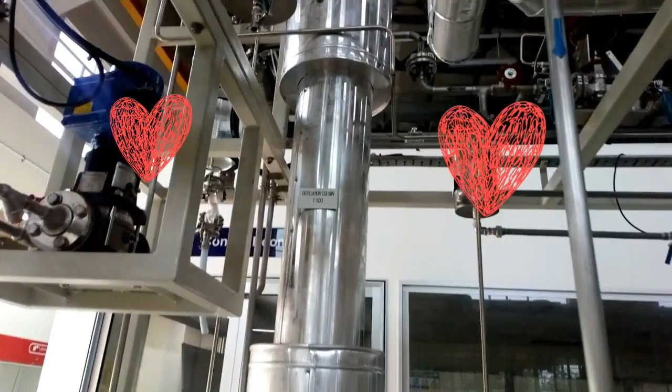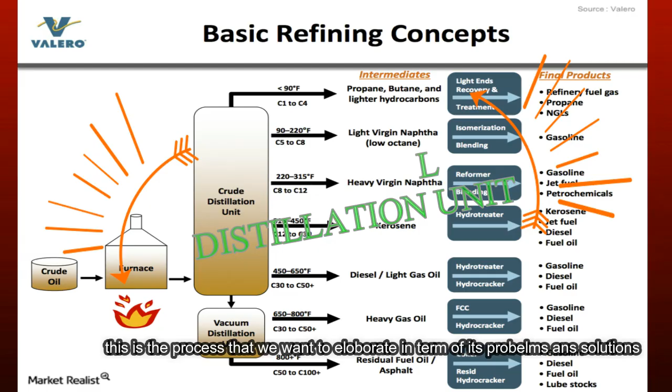The first process for all petroleum refineries is known as the distillation process in a crude oil distillation unit, or CDU. This is the process that we want to elaborate on in terms of its problems and solutions.

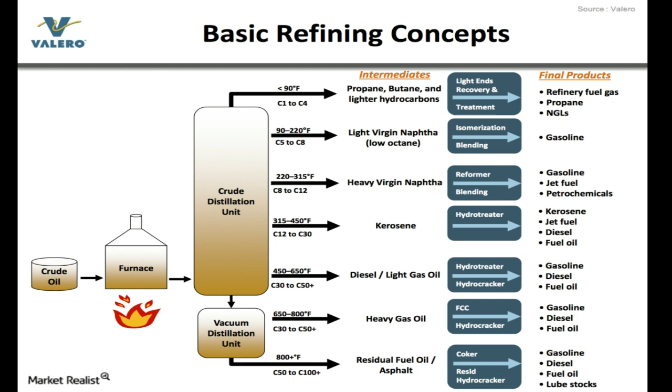In this process, crude oil is heated and fed into a distillation column. As the temperature of the crude oil in the distillation column rises, the crude oil separates itself into different components called fractions. The fractions are then captured separately into various fractions of different boiling ranges. Each fraction corresponds to a different type of petroleum product, depending on the temperature at which that fraction boils off the crude oil mixture.

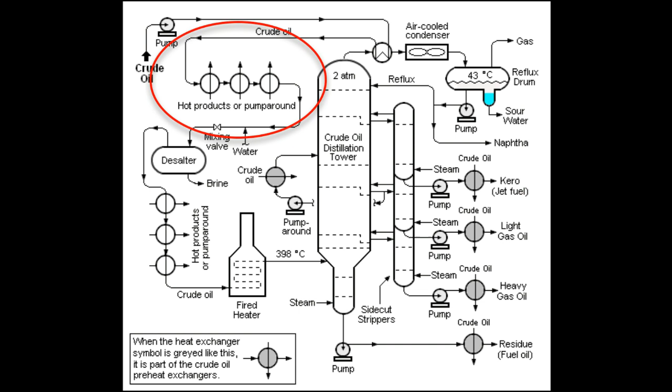Based on the figure, it shows the process in the crude oil distillation unit. After the incoming oil is preheated by a heat exchanger, it is then desalted to remove inorganic salts such as sodium chloride. After that, the crude oil is further heated in a fired heater at a temperature around 398 Celsius and routed into the bottom of the distillation unit.

Cooling and condensing of the distillation tower overhead is provided partially by a heat exchanger with the incoming crude oil, and partially by an air-cooled or water-cooled condenser. Additional heat is removed from the distillation column by a pump-around system, as shown in the figure. The overhead distillate fraction from the distillation column is naphtha.

The fraction removed from the side of the distillation column at various points between the column top and bottom is called a side cut. Each of the side cuts, such as kerosene, light gas oil, and heavy gas oil, is cooled by exchanging heat with the incoming crude oil.

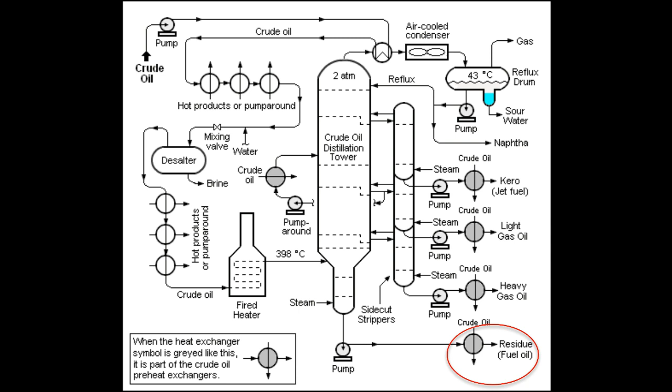All of the fractions, such as the overhead naphtha, the side cuts, and the bottom residue, are sent to intermediate storage tanks before being processed further to get the heavy residual oils into end products like petroleum coke, as well as naphtha and diesel oil byproducts.

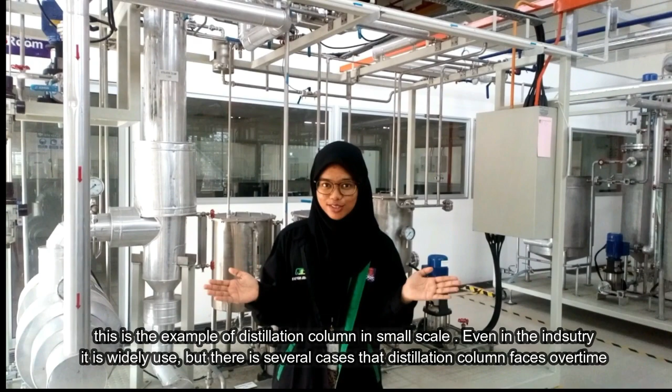Okay, so this is an example of a distillation column on a small scale. Even in industry, it is widely used. But there are several cases that a distillation column faces over time. So let's see the problems that a distillation column undergoes.

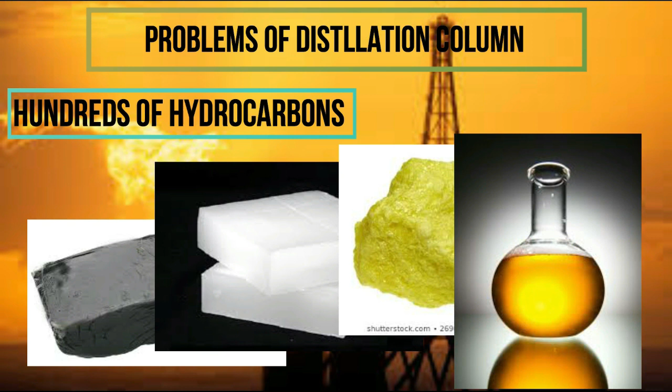The first problem a distillation column faces is that hundreds of hydrocarbons enter the vessel at one time - for example, naphtha, paraffin, sulfur, octane, and many more. How does the vessel handle all of these substances at one time? Does the distillation stand up to all of these substances? Let's move to the second one.

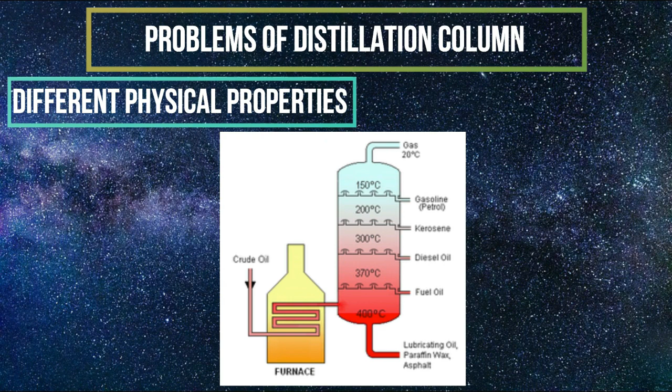Because there are so many mineral and chemical substances, they tend to have different physical and chemical properties. As we all know, distillation separates components according to their boiling point. But how does it make sure all the components are separated according to their group? This is because the boiling points of diesel, fuel oil, and lubricating oil are 300, 370 and 400 degrees Celsius respectively. All the boiling points are different, so let's see how it operates later.

Lastly, the problem that every vessel or pipe faces is the presence of fouling because of excessive mineral in the chemical substance that flows into the vessel. As you can see here, this is an example of fouling. The question is, can these three problems be fixed, and how?

Needless to say, the distillation column has its own distinct function. For example, the distillation column is used to separate multi-component mixtures. However, there are a few issues that can occur in the distillation column, either in the column itself or in its process.

In this section, we are going to discuss the proposed solution. The solution for the first problem is by using the cracking method. This is because the cracking method is used to separate large hydrocarbons into smaller pieces. Since crude oil has many different types of hydrocarbons, there are 4 types of cracking methods: the first is steam, the second is thermal, the third is visbreaking, and the last is coking.

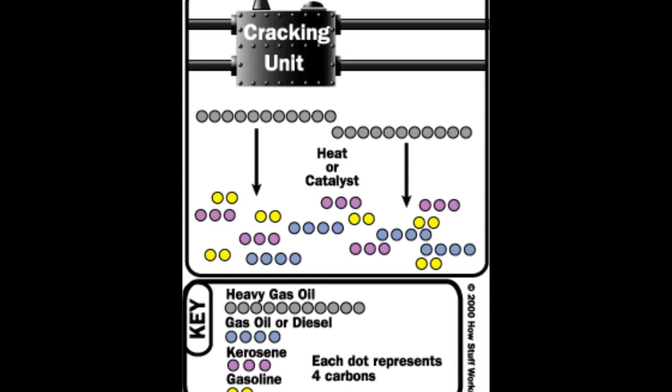Consequently, the industry can get their selected components from crude oil to make their products. Moving on to the second solution to the problem, the method of fractional distillation. The difference between the first solution and the second is that the first solution is used to break down hydrocarbons, while the second, fractional distillation, is used to separate a component into various components or fractions.

Vapor rises to the top of the column. The tray will collect the vapor and separate it into various fractions. The liquid may pass through a condenser to cool it down and store it in a storage tank, or it can be transferred to another section where it can be further processed into the desired product.

With this method, the substance can be easily fractionated into its own components and its own specific stream, where it can be produced into the desired product.